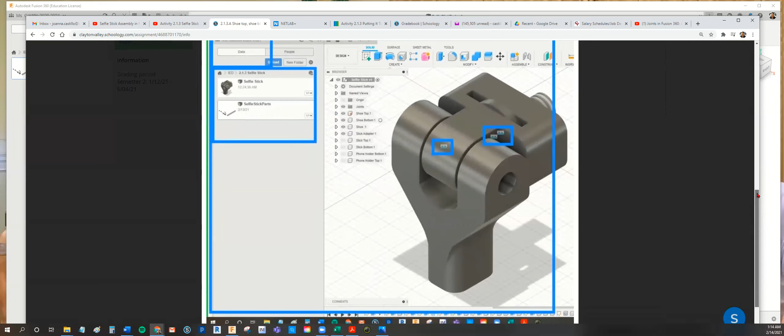Okay, in this video I'm going to show you how to do assignment 213A. We're going to start assembling the selfie stick. What you're going to submit for this assignment is a screenshot like this here. We're going to start assembling some of the components, and this is what you'll submit. Let's get started.

Okay, so here I have Fusion open. Just like from the previous assignment, I had you upload the selfie stick's design file onto a folder that you created, 213, called selfie stick. So we're going to start assembling it using these parts here.

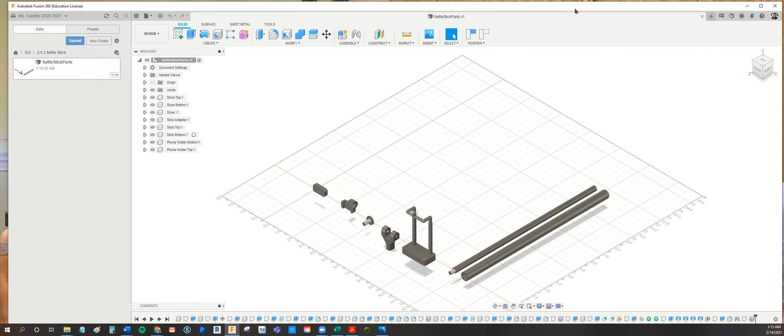Just like in the last assignment, we learned about the 7 types of joint constraints in Fusion 360. Let me show you here real quick. If I click on here, on Fusion, the 7 types are already listed. For the selfie stick assignment project, we're going to work with 3: rigid, revolute, and slider.

For this assignment 213A, we're going to just do rigid and revolute. But here are the 7 types: rigid, revolute, slider, cylindrical, pin slot, planar, and ball. These are the 7 types of joint constraints that Fusion has. They're also called mates in other 3D programs like SolidWorks, but it's the same premise.

Okay, so here are the selfie stick parts. What we're going to do is work on 4 of the components, not all of them. So I'm going to go ahead and turn off the visibility on some of these. Let me show you what the parts are.

If I click on it, this is the shoe top. This is the shoe bottom. These are what the components are called. This is the shoe — it looks like a screw, but in terms of the selfie stick parts, the screw is called the shoe. This is the stick adapter, the stick top, the stick bottom, the phone holder bottom, and the phone holder top.

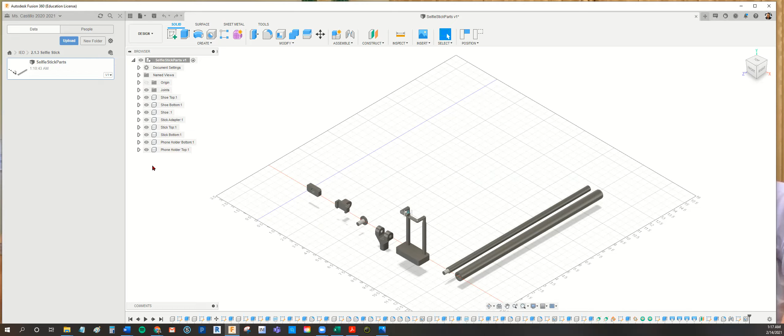Right now we're just going to work on these 4 components of the selfie stick first. So I'm going to turn off the visibility of the others by unchecking the eye icon. I'm going to turn off visibility for the phone holder top, the bottom, the stick bottom, and the stick top. We're going to work with these 4.

All right, so to get started, in Fusion 360, when you're working with components and assembly, one of these components always has to stay grounded. So we're going to ground this shoe top here. To do that, I click on the shoe top level to highlight it, left click, then right click to get all the options, and hit ground — second from the top.

So now the shoe top is grounded. That means it'll have 0 degrees of freedom. It's not going to be able to move along the x-axis, z-axis, or y-axis. Again, the red line shows the x-axis, the blue line shows the z-axis on this plane, and you can't really see the green line, but that is the y-axis.

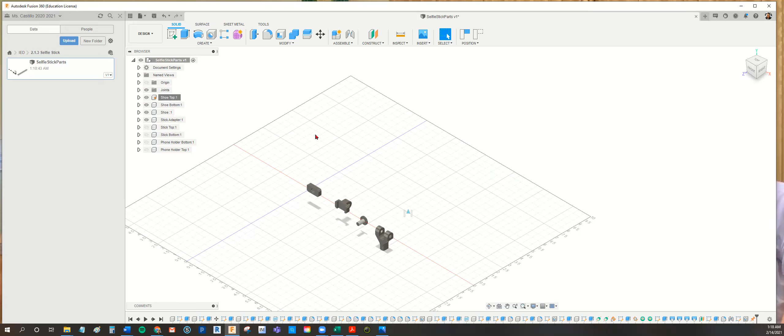So we grounded the shoe top. Now, let me zoom in — we're going to put the shoe on the shoe top. Then from there, we're going to put the shoe bottom on top of the shoe and the shoe top. And then we're going to put the stick adapter on. So those 4 things we're going to do for this assignment.

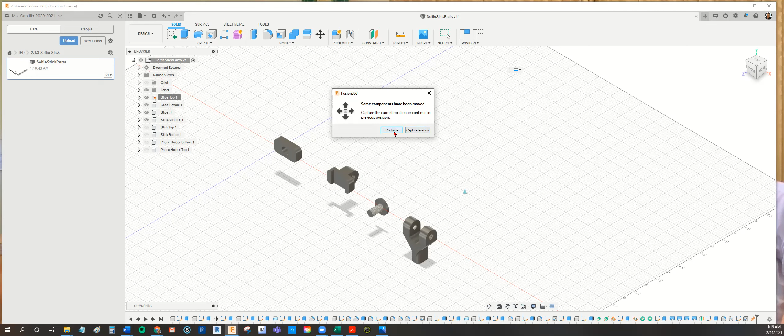I'm going to click just like we did for the assembly in the blocks — go to assemble, then hit joint. Just like in the last assignments, we're always going to hit capture position. If we hit continue instead, the components are just going to move back to their original places. So I always hit capture position. Let me show you again.

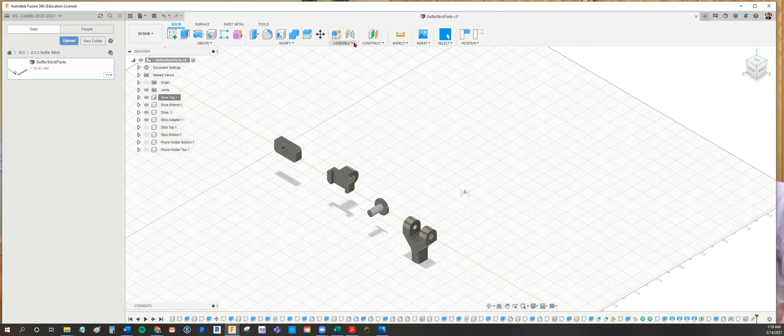So what we're going to do is move the shoe — touching the circle, we're going to go from here to here, the hole onto the shoe top. So this is point A to point B. We always have a 2-step command: go from here to here. I'm going to click on assemble, then joint, capture position, then click the circle onto here — component 1 to component 2.

Let me show you here. If I click on the motion tab, let's make sure it's on rigid, because it's going to be a rigid constraint, right? It was by default on Revolute. So I'm going to click on the rigid constraint, go back to the position tab, and click on the face of the circle of the shoe onto the hole face of the shoe top. See how it just moved?

Obviously we don't want the screw facing that way, so we can flip it, and the screw will be facing the north side instead of the south side. See that? I just flipped it this way. I'm going to flip it over and let it face this north side going this way. Okay, hit OK. So that's the first thing we're going to do.

So now that the shoe is screwed into the shoe top, we're going to move the shoe bottom onto the assembly here where the shoe and the shoe top is. It's also going to be a rigid constraint, joint constraint. So I'm going to click on this face here, the inside face of the shoe bottom onto the outside face of the shoe, the top of the screw.

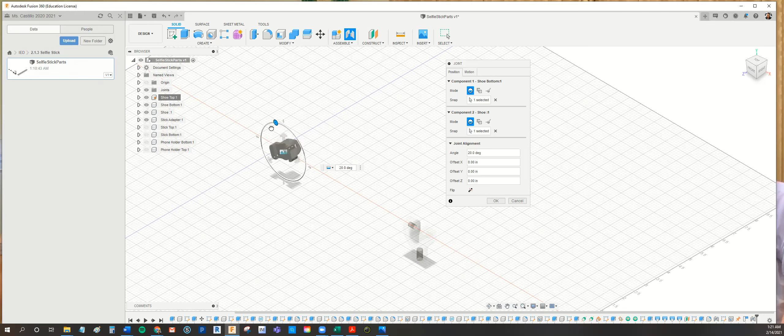Let's do that again. I'm going to click on, okay, I undid that command. I'm going to hit assemble, joint. I'm going to click on the inside here onto the circle part, not onto the actual shoe top. I'm going to click on the shoe itself right there. And it needs to go - oh, that's not the way it needs to go. Okay, hit cancel, let's do that again.

Okay, so I'm going to click on assemble, joint, click on this face onto here. There we go. See how it turns? So that's how it should look. After a couple of tries, that's how it should look. Hit OK. So now I have the shoe bottom, the shoe, and the shoe top assembled.

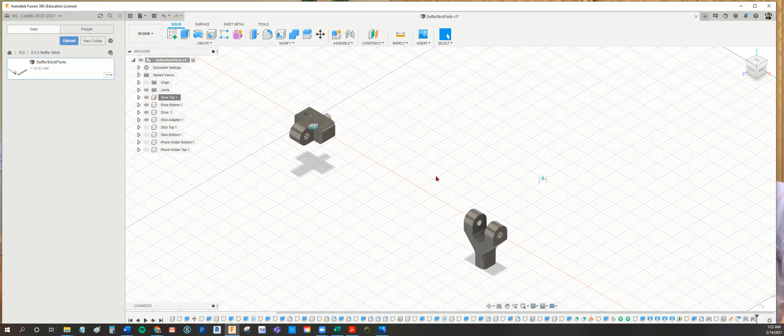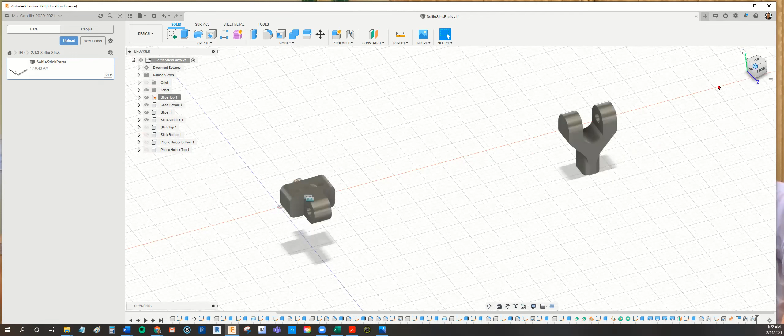So now we're going to put the stick adapter on here. We're going to place the stick adapter onto this assembly here. I'm going to click on the inside edge, the inside left face of the hole here. Let me rotate onto here, on the outside edge of this hole. Let me show you that again. Click on the default view. So I'm going to click on the inside left face of the stick adapter, rotate the view onto the outside left of this assembly here.

So this time it's going to be the Revolute command. Let's go ahead, click assemble, click the joint. And then I'm going to click here on the motion tab, and click on Revolute. We're going from rigid to Revolute, right there, second from the left. Again, let's click on position.

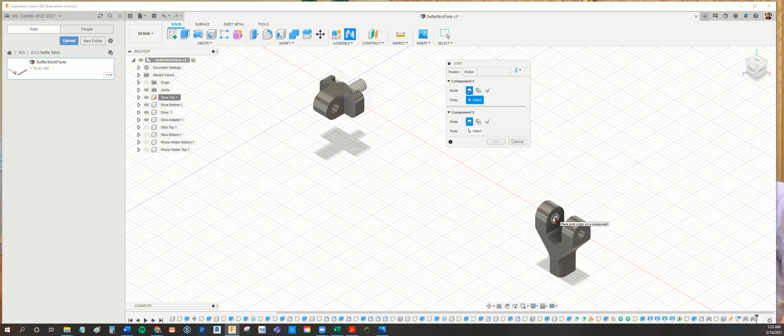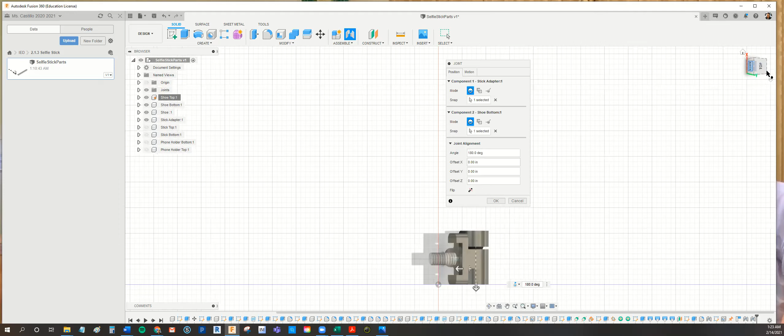I'm going to click on the face right here, the inside left corner. Then I'm going to rotate the view cube onto here. And see that now it's revolving. So before we hit OK, I'm going to look up from the top. You can see all the views, see how it looks. This is from the back. Here's the 3D view. It's over. Here's what it looks like from the right, from the back, from the left.

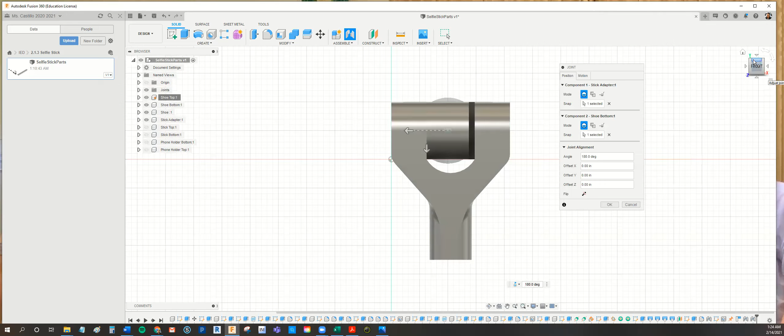But it doesn't look symmetrical. See how it's like to the left? There's no space here and there's like a big gap here. We're going to try to fix that. Let's click on 3D view, let's click on the top.

Okay, so here, see, I'm going to click on this arrow. I'm going to see if I can see how it goes. If I go this way, it's 0.10 inches. Go this way, it's 0. So I kind of want to make this even. All right, so see how the offset's 0.10.

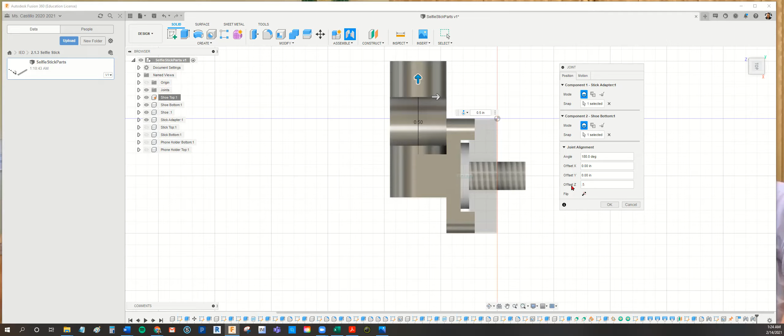Let's see if we change this offset Z to 0.5. Nope, that's too far. Let's try 0.05. Nope. All right, let's do 0.025. Perfect, see that? So I went from 0.05 to 0.025, so we cut that in half. There's a gap of 0.025 here, and 0.025 over here. All right, so hit OK.

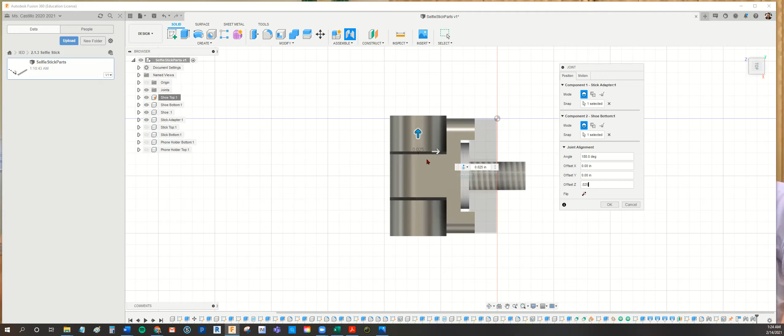All right, so click the home view, and this is what I'm going to want to see. This is what you're going to screenshot. Oh, let's go ahead and save it. Save, hit OK.

All right, let's undo that. Can I undo that? Nope.

Okay, I'm going to hit save as selfie stick.

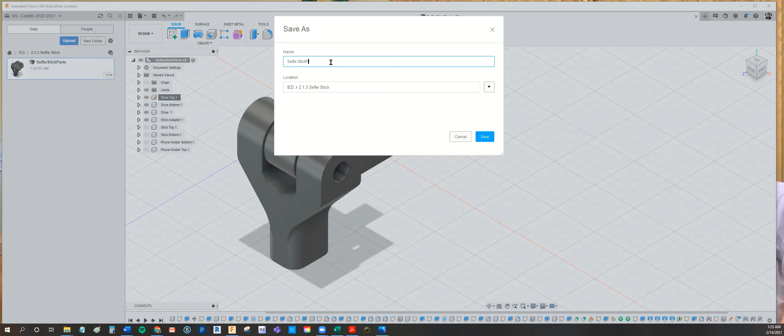I don't know that call. It's my cousin calling.

We're going to name this a selfie stick. And this is what you're going to screenshot. Show it to you.

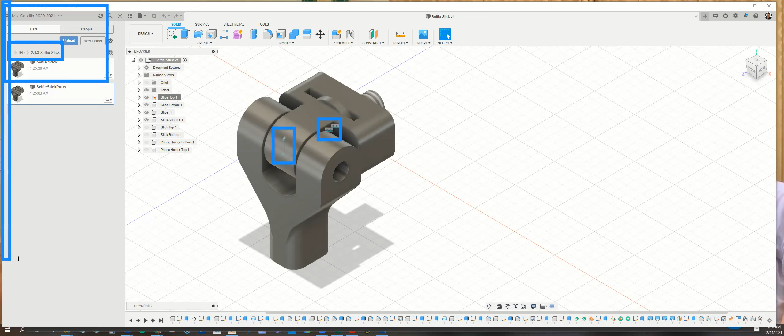Okay, so this is what I'm going to want to see, that you're going to submit for the screenshot for this - 213, 213A for the selfie stick assembly. All right, so that's it for this video.